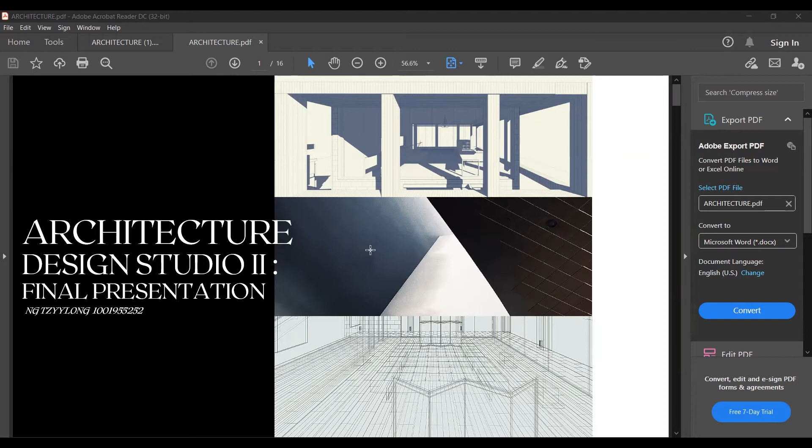My client's name is Red Hong Yi. She was born in 1986 in Kota Kinabalu, Malaysia. In 2004, she attended the foundation program at Trinity College, Australia. After a few years of studies, she graduated with a Bachelor of Planning and Design in 2007, and a Master in Architecture in 2010 from University of Melbourne.

After she moved to Shanghai to work for the Australian architecture firm Hassell, the environment in Shanghai really inspired her to start creating artworks to document this new chapter of life. She began to upload videos of her work on YouTube, which got her famous.

Next I'm going to talk about concept and ideation. My concept is based on my research on her artwork, and I noticed that every single piece had a similarity of grid organization, meaning square to square. This is where I got my concept from, and I decided to use a grid system to develop my design in terms of space and facade.

This is the first stage of my design concept. You can see this is a zoomed in view of her artwork with a lot of grid organization. Moving on to concept stage one, I drew out the basic shapes of the grid system.

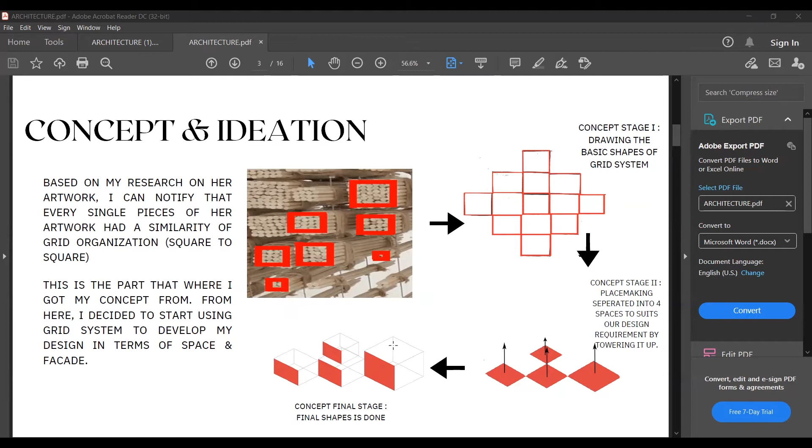Moving on, our site is located in Perdana Botanical Garden, basically in KL. Our site placement is on the island of Bamboo Playhouse.

The site boundaries have a total area of 1,896 square meters, and the buildable area inside the setback is about 1,418 square meters.

This is the site analysis I did. The morning sun rises from here, the afternoon sun at 12pm noon will be over here, and the sunset will be over here. The wind path comes from the north side. This is the Bamboo Playhouse.

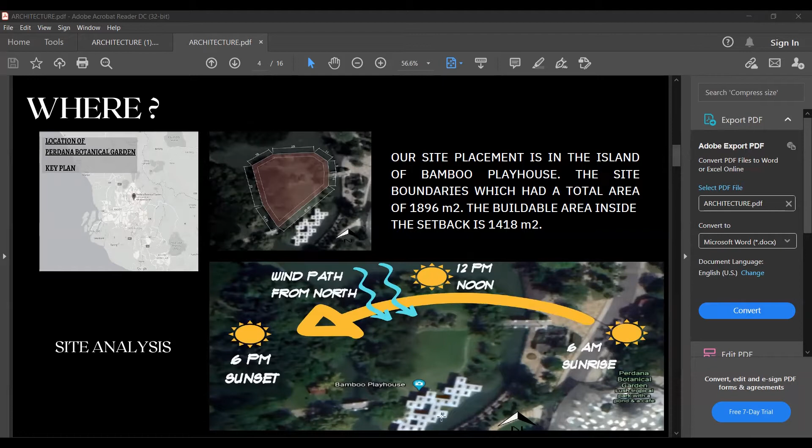Next is the bubble diagram. For level 1, the main entrance will be over here, so people can access through here, and the main door will be over here. Going in will be the gallery, with a public toilet inside. This moves on to the second entrance area for my client, for her to access living and dining, kitchen, master bedroom and bathroom.

From my gallery space, you have a level 2 story. If you go up here, you can access her workspace and also storage.

Moving on to the space and adjacency matrix. The biggest space will be the art gallery and workspace, about 78 square meters total. Living and dining will be 42 square meters. Master bedroom and guest room will be 36 square meters. The smallest area will be the kitchen, at 16 square meters.

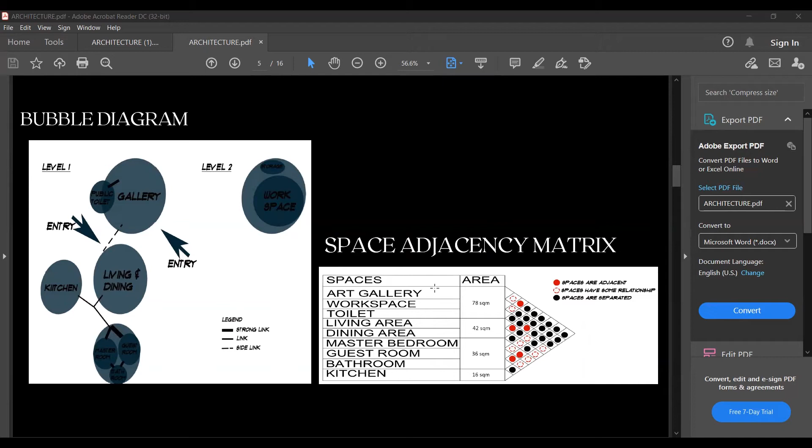Moving on to site placement consideration and site plans. I considered 2 site placements, each with its own advantages and disadvantages. The first one has disadvantages, meaning the master bedroom placement is too near the trees, and the walkway is difficult to relocate.

For the second one, it has good advantages, allowing the relocated walkway to be organized neatly, and the building is placed in the middle of the site.

This is the final site plan I did. As you can see, this is access bridge number 1, where people can access through the island. This is access bridge number 2, and this is the playhouse.

This is the walkway for my client to access the living and dining, kitchen area, and bedroom area. This is the public walkway for people visiting the gallery house.

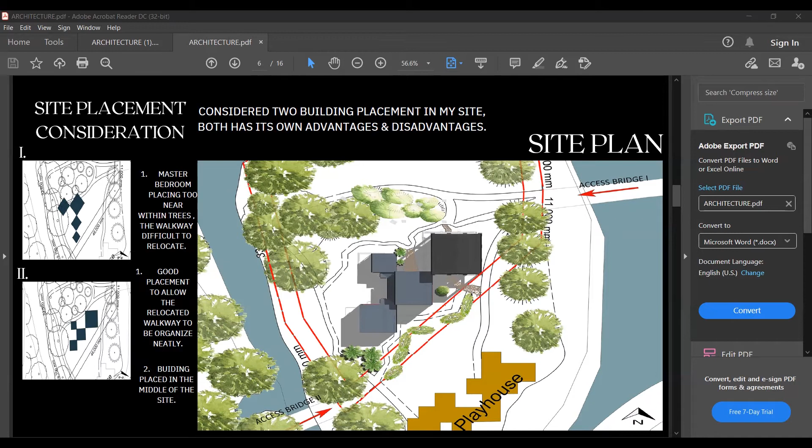Moving on to the exact final floor plans I did for my project. The first one is the art gallery. The main entrance will be over here, with a sliding door, and people can go in to look at artworks and drawings, and use the public toilet if needed.

These are the columns, and this is a walkway through the indoor space. This walkway is also for my client to access the living and dining, and also the master bedroom, guest room, and bathroom.

This is for her to cook something and then make some coffee over here. Moving on to level 2, this is where the client can go up, and this is a workspace, and this is a storage where she can store all her materials and stuff.

I also drew out the roof floor plans and labeled it with arrows so that it's not flat, it has a slope. The arrow is facing this way, meaning the roof is sloping, and has a gutter at each side.

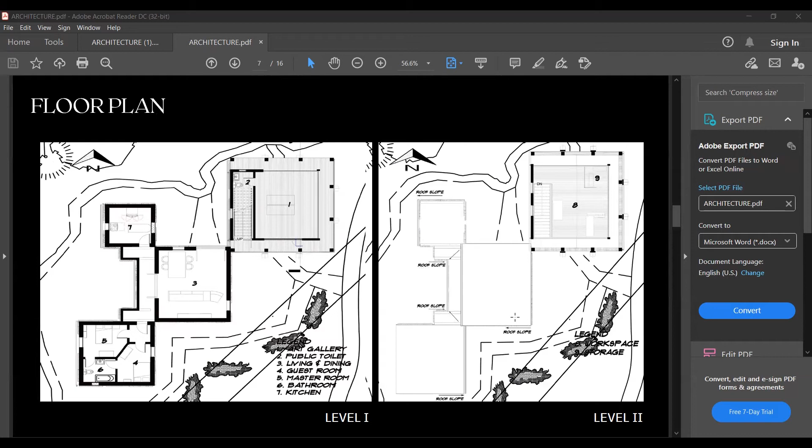Moving on to interior perspective 1, as you can see I created these spaces. It clearly has an indoor walkway, so when it rains it doesn't really come inside the walkway, so people can wait outside and then go in to visit inside the gallery.

These are the columns, and also considering the noon sun, it doesn't really brighten up inside this gallery, and it's not very hot because of these columns and the overhangs of the roof.

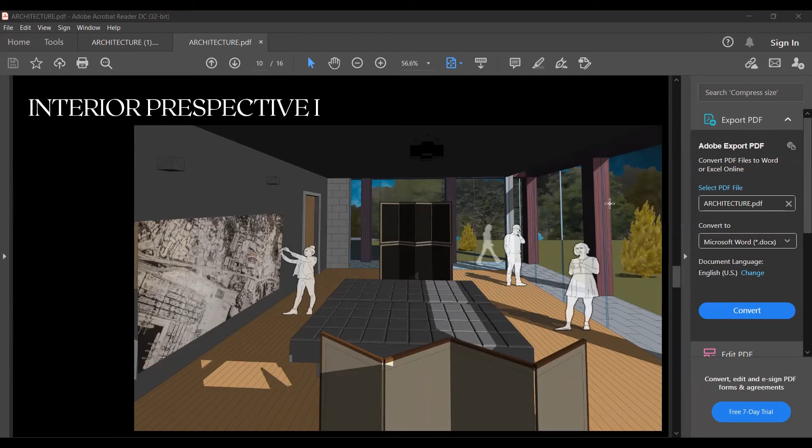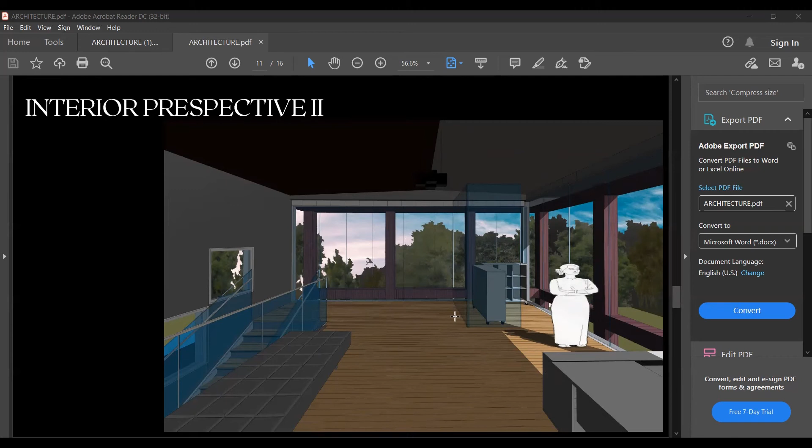Moving on to exterior perspective, from this view I want to show that I have created a stone path walkway for my clients, and also added lighting along the walkway for my client to access easily at nighttime, to reach the living and dining area.

These are the red brick facade, and these are the downpipes for the gutter where water flows down. These are the wall washing lightings.

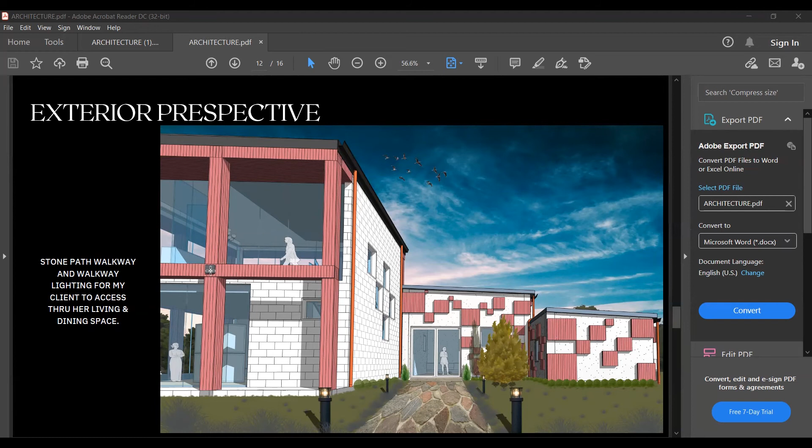Moving on to section perspective, for this I want to talk about the red brick columns and red brick beams. I used a dimension of around 300 mm for the red brick columns and 300 mm for the red brick beams.

For my floor details, there's one layer of plywood floor finish, one layer of waterproofing, 50 mm lean concrete, and the last layer is 250 mm compact hardcore.

Moving on to the last one, it's 25 mm thick screeding with brush finish, 50 mm lean concrete, and 250 mm compact hardcore. So these are the beams.

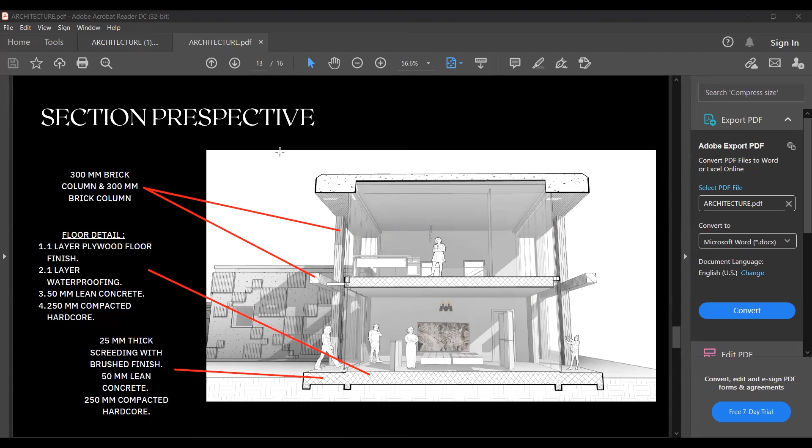From this perspective it doesn't show the roof, it's flat. For this one, it shows my roof is around 36 degrees slope so that the water can flow properly into these gutters.

Considering the surrounding has a very moist environment, these are the gutters. For my roof structure and construction details, I used one layer of waterproofing membrane, 150 mm thick RC slab, and 25 mm thick base screeding.

Moving on to my section XX, I'm using pad foundation footing. As you can see, this is a beam.

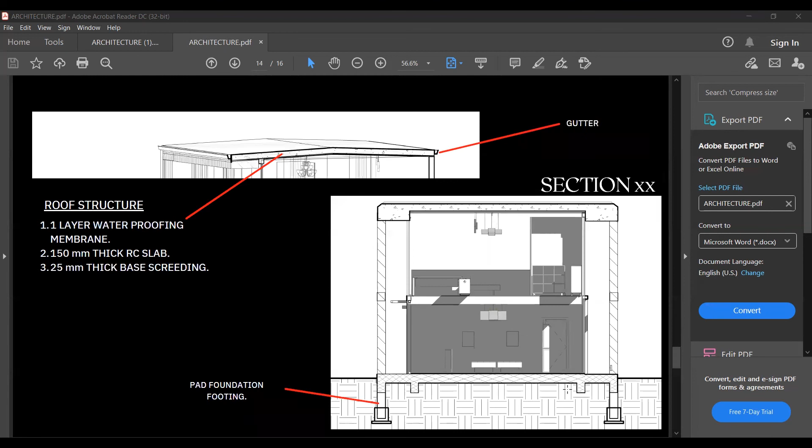Moving to section YY, this is my roof structure. It has a 36 degree slope roof to ensure the rainwater flows into the gutters on each side. The walls use reinforced concrete, and this area is for the public toilet area. For the interior floors and walkways, there's a 50 mm rise in the ground so that when it rains, it doesn't soak inside the gallery.

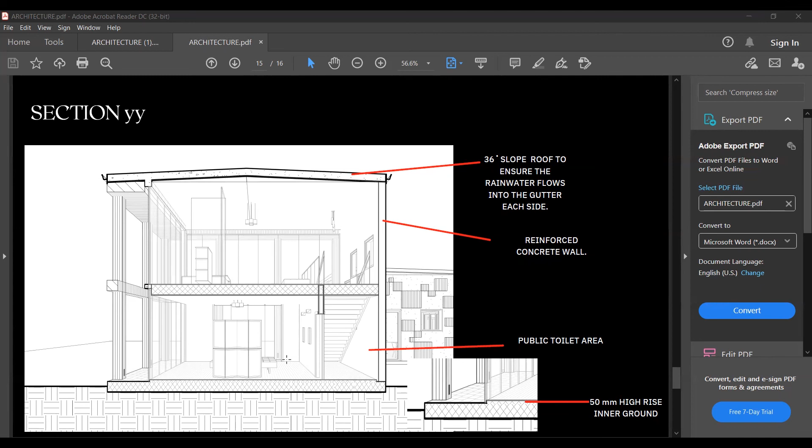So the last one is my clear image of my exterior perspective. As you can see, this is a stone walkway, the access for the public to enter the gallery, and this is a lighting walkway.

People are taking photos of this red brick facade, and this walkway is for my clients to access the living and dining area, also the master bedroom. These are the wall washing lightings, and these are the downpipes for the gutters where water flows down.